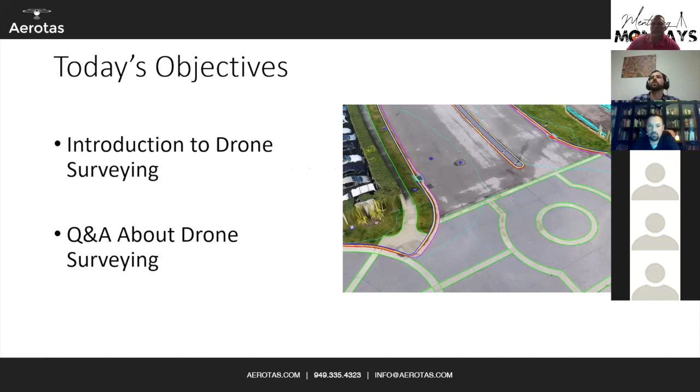So the main objective is just an intro to drone surveying and a Q&A about drone surveying and some of the types of work that we do. This is in no way at all a sales pitch. This is truly how we view the process of drone surveying. But just a little bit about us. We have been doing drone data processing for land surveyors since 2014. That is all we do. We work exclusively with licensed surveyors and engineers. So we've gotten over the last 6 years to know this stuff pretty darn well.

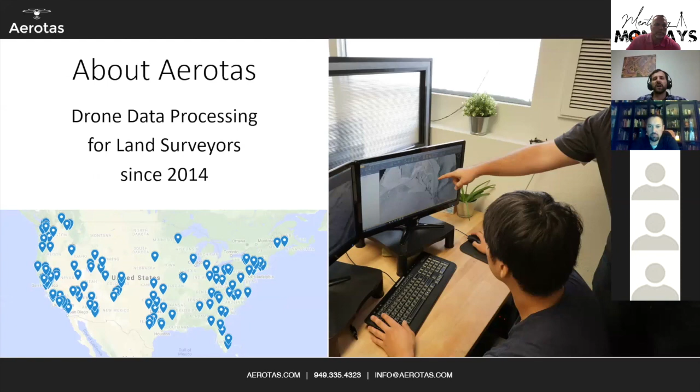A little bit about me. I am the CEO, founder, and lead photogrammetrist of Aerotas. I actually have an educational background in finance and statistics, and statistics is what led me into photogrammetry. And I am a certified photogrammetrist as well. So those are my credentials on that end.

One of the things that I bring up right at the beginning is our philosophy to drone surveying: if your drone program isn't saving you time and money, it isn't working. We very much have a philosophy that drone surveying is not a science fair experiment. This is not, ooh, cool, let's spend all of this money and do something cool with it. We're very laser focused on how to use it in business. If you spend $100,000 on a drone, on hardware, and it takes you 50 hours in the office to get a single half-acre project site done, that's bad. That's a science fair project. We don't like it. So I'm going to reference that a lot.

It's worth noting, because a lot of times people ask, what about this thing on the cutting edge? Is it possible? A lot of times the answer is, yeah, it's possible, but it doesn't make sense to. You guys are surveyors. If it makes more sense to use a total station, use a total station. I'm not going to say, yes, you can, but you'd need to take 8 million photos from these angles and a server the size of NASA to process it all. That's not where we go. We really focus on practical applications, and how you can use this technology most simply, most effectively, most reliably.

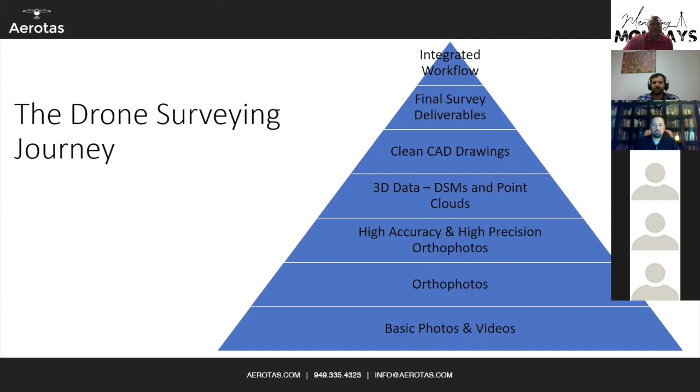them money. You want to make it integrated as part of your workflow so that it makes everyone's life easier, from the field crew to the office guys to your end clients, who will wind up liking this stuff and saying, hey, wow, that looks so much better with the imagery. You turned it around faster, it's cheaper, makes you more competitive on bids. That integrated workflow is really how you wind up getting all of that last stuff put together. And to do that, there are a couple of really important steps.

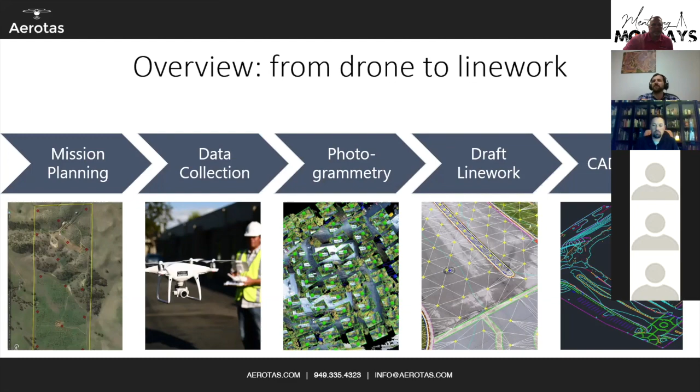So these are the main 5 steps that I will go through that go from "I'm thinking about using a drone on a project site" to final deliverable. Starts with mission planning, which is of course the basic where to fly, how high to fly, should you use a drone at all; data collection, going out in the field. And then the office components are photogrammetry, which is image stitching; drafting your line work, extracting the data that you want; and then finishing it in CAD, putting everything back together in CAD for a final deliverable. And I've got some examples of this stuff too.

Because ultimately, what you're looking for, or at least what clients and users are looking for, is a survey. Very, very few people look for a drone survey. They want a survey, and they don't care how you get it. Some clients do, of course, and it is important to disclose methodology, obviously, but ultimately, most clients don't dictate you must use exactly a Trimble R10 or a Leica GS16. They say, get me a survey and make sure it's accurate.

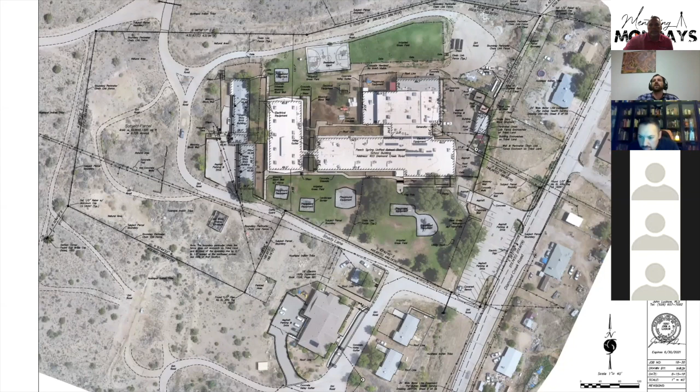And so this is what a final deliverable looks like. A good chunk of this was collected with a drone, but not all of it, because there's easement data and other data on there that can't be seen from the air. But this is what a final survey deliverable should look like, part of that integrated workflow with drone and your other data sources as well.

But to start off with, one of the things that I like to talk about first that everyone's interested in is the latest in drone technology. First off, the main thing about drones is actually not the drone itself, it's the sensor. That's what gets you your data. And there are 3 major categories. The first is a drone-specific camera. If anyone has a DJI Phantom series, Phantom 4 Pro, Mavic series, Phantom RTK, that's what you're getting. These things are built into the system. They're extremely reliable, super easy to use, and actually get really good accuracy. Far and away, that is the most common thing in drone surveying.

Currently, a good LiDAR option costs about $150,000. The new DJI one, all in, so the sensor, the drone, literally all the stuff you need, you're looking at about $45,000. So still not cheap at all, but considerably better. Hasn't been released yet. That's coming out probably in January, when they'll actually start shipping. We already got our orders in with DJI to get those early so that we can do the early testing on it. So we'll let you know about those and our test results the instant that we get them, if it actually lives up to the hype.

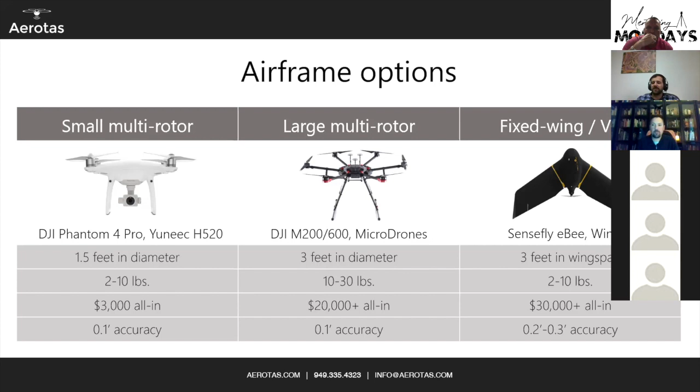So that's hardware. But now to get back into what the actual process of drone surveying looks like, as far as those five steps that I had. The first one is, of course, mission planning. And mission planning is really, really important. But first, we have to talk about what it is. It's asking basic questions like, is this a good site for drone photogrammetry? Not every site is. Like I kind of mentioned, vegetation is a big problem. If you have dense tree canopy and you need ground topo data, drone photogrammetry is not going to be the best solution for you.

As well as asking a few other questions. Is it legal to fly here? What altitude should I fly? What's the appropriate overlap? How many ground control points should I set? Where do I set them? And how do I arrange the flight pattern? And then what still needs to be ground surveyed?

For people that have actually done a couple drone surveys in a row, they know this is actually really easy. You get to know this pretty well. It's not rocket science whatsoever to figure out these questions, but it does just save you time to ask it in advance to decide whether or not you're going to use a drone or whether you're going to bring out the GPS or the total station or any other number of tools available for you guys.

We talk about what's a good project for drone photogrammetry. General rule of thumb, good projects for drone photogrammetry are anywhere between half an acre up to about 500 acres. Anything smaller, it is typically faster and more cost efficient to just shoot everything on the ground. Anything larger, it starts to make more sense to hire a traditional manned aerial photogrammetrist. Same thing applies with linear projects. If you're doing any sort of corridor mapping, railroads, pipelines, things like that, up to about 20 miles makes sense to do via drone.

Generally speaking, the higher you fly, you cover a lot more area, a lot more ground with a slightly lower accuracy. But generally speaking, most projects that we see are flown at about 200, 250 feet elevation, and 100 foot is reserved for very tight, small projects that are mostly hardscape. 400 feet is when you need rough topo over very large areas. In fact, I do actually have some examples here. Zoom thing. There we go.

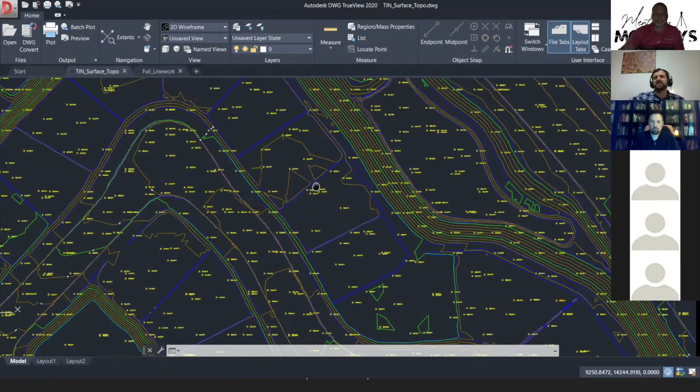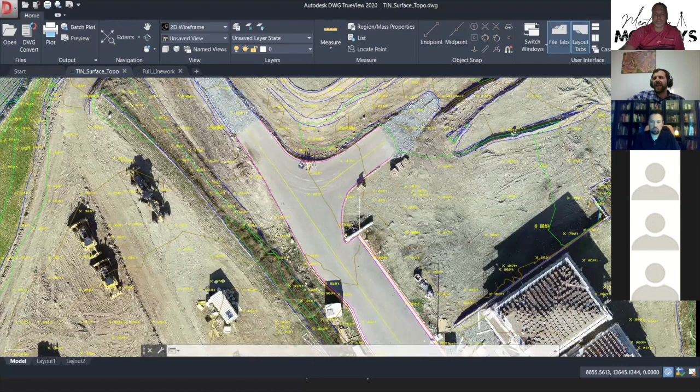Like this is a huge, I think I want to say this is 50, 80 acres or something, just big dirt grading lot, empty lots that was done via drone that just needed rough contours. So it was flown at a couple hundred feet, and this is what our final product looks like. And you'll notice this isn't a fancy point cloud or something. This is actually clean topo so that it's not contours going all around the tractors and trailers and everything. This is really what a final drone product ought to look like. And of course, these are just our CAD standards, but making it look right to you is dependent on your project needs. So that's kind of what it looks like and where your requirements are for the actual accuracy.

Other things that commonly get asked are things about overlap with a drone, front lap versus side lap. What are the different requirements? There's a lot of, I want to say, debate almost within the community of what the right overlap is. Traditional aerial photogrammetry uses very low overlap because they're using extremely expensive cameras. We have found through the many thousands of projects that we've done, the sweet spot is about 75% front lap and 75% side lap, which means that about 75% of each photo will be covered in the next photo. That gives good reliability and redundancy and high accuracy without getting too much data. And too much data, as I'll talk about in a second, is very much a problem with photogrammetry and with drone surveying.

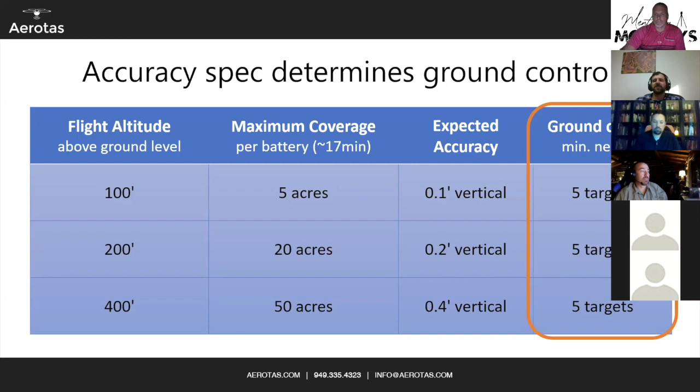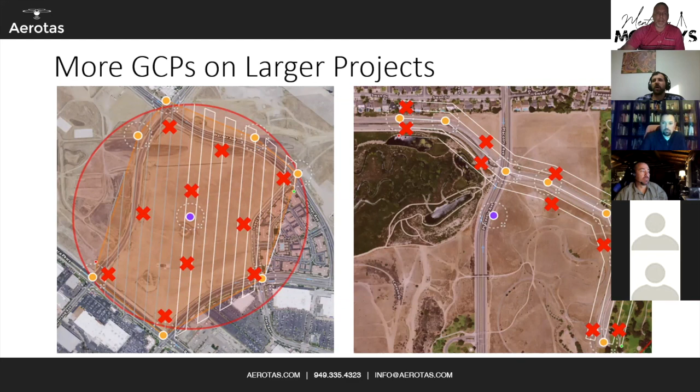Larger the project, more ground control you need. Pretty straightforward, kind of goes without saying here, just some examples. And of course, I will have a copy of this deck available to everyone after the fact if you want to look through any of this stuff.

With the advancement of airborne RTK and PPK data, that's something that we're seeing a heck of a lot more now, which is great. The technology for airborne RTK and PPK has advanced dramatically and is really high quality now. However, do not believe the hype that most hardware companies say when they're like, you don't need ground control points whatsoever, it's got RTK, it's perfect. That is just not true for surveyors. Surveyors have a higher tolerance for accuracy.

The RTK data is very, very good at determining where the drone was when it took the photo. But you do not care about where the drone was, you care about where the ground is. And in between the drone and the ground is the camera, and there's a lot of noise there. So you actually do still need some ground control just to make sure that everything is in alignment. As far as camera calibration goes, you can see shifts of up to half a foot, sometimes more, even with perfect RTK, PPK data.

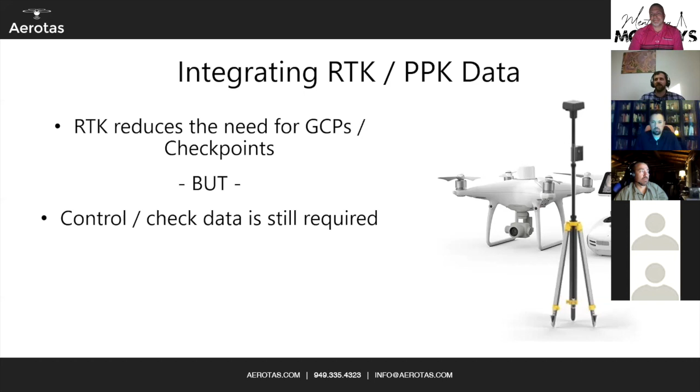So if you take one thing away from this slide here at least, it's that do not trust the people that say that RTK means that you don't need control. As surveyors, you need control, 100%, at least to get survey grade accuracy. If you just want a pretty picture, then sure, go for it. Next up, let's talk about field data collection.

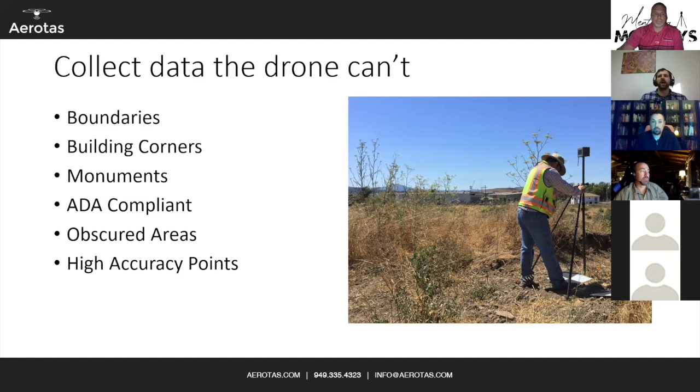If you're doing an ALTA survey, there are a number of things that legally have to be shot on the ground. Monuments, your ADA compliant areas, and anything that's obscured from the air, but the drone is capable of getting pretty much the rest that you need.

As far as actually collecting your data, we recommend checklists. We give these things out for free that are just little things to keep you on track, keep everyone together, keep you from making the really stupid mistakes that I used to make all the time, like leaving batteries in the office or not remembering a memory card, because when you get to the field and you don't have everything you need, it's a real bummer.

And maybe that's why you have 170,000 miles on your truck in a year and a half, is because people have to keep going back and forth to the office because they forget things. But hopefully not. Maybe it will at least prevent 1 or 2 return trips to the office from just forgetting something stupid.

But yeah, the field operations workflow is pretty straightforward. You check your site restrictions, check the weather to make sure it's not raining, pack everything up, and load the mission and click go. These drones literally, truly, completely fly themselves. There is no piloting, no skills, no crazy stuff necessary. You don't need to be an ace drone pilot in order to fly a survey.

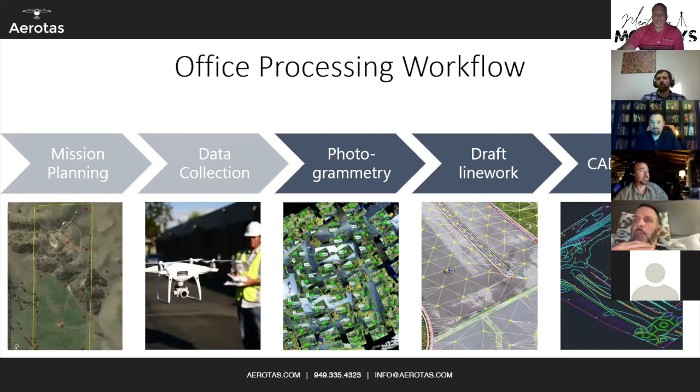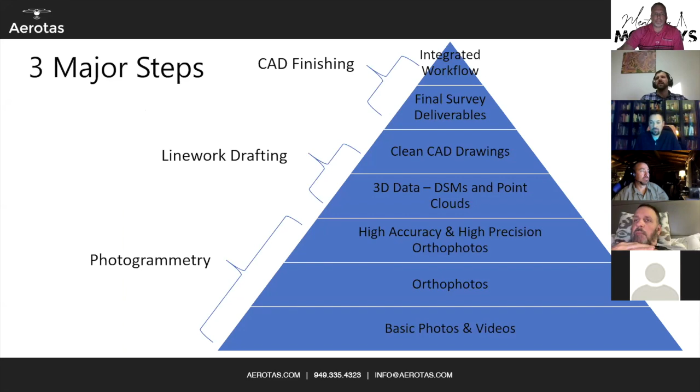So that's the field half, but what a lot of you are probably interested in is the office side of things. The office workflow is these final 3 steps of photogrammetry, drafting line work, and then CAD finishing, right? Photogrammetry really gets you those first couple of steps on that drone survey journey. Linework drafting extracts valuable data, and it's bringing it all together in CAD that gets that final portion.

So the first step is photogrammetry. Now, what is photogrammetry? Photogrammetry is the art and science of taking 2D photos and turning them into 3D accurate data. There are lots of softwares out there, from Pix4D to DroneDeploy to Agisoft Metashape. We're familiar with all of them. They all actually work for different applications. But generally speaking, the photogrammetry step takes your photos and ground control point data and turns it into a point cloud, an orthophoto, and a digital surface model.

Then you need to take that digital surface model and reduce it into something that's useful. For anyone that's dealt with point cloud data, whether it's from a drone or from LiDAR, you know that it can easily go 10 gigabytes in size and break even the most powerful office workstation. And you certainly can't just give a 10 gigabyte file to most of your clients that actually want an ALTA survey, for example.

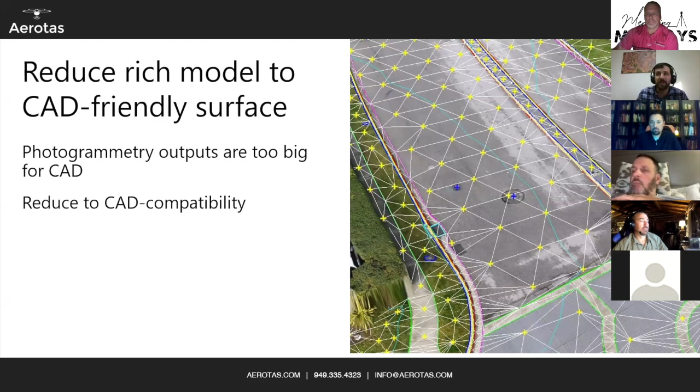So what the linework drafting stage does is it takes those rich outputs and it extracts the actual data. It's putting the different layers on things, drawing curb lines, creating a clean topo TIN surface that is actually usable, getting rid of things like vegetation, vehicles, artifacts, interpolating your lines underneath trees, all the stuff that photogrammetrists have honestly been doing for a very long time with traditional photogrammetry. This is not reinventing the wheel at all. It's just applying the newest technologies to it.

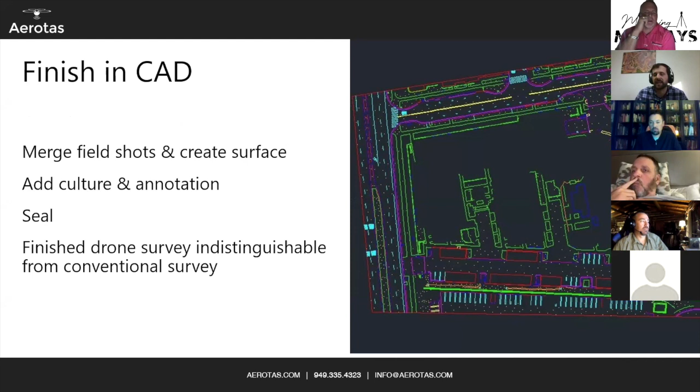And then you bring it all together in CAD. You merge your field shots in, create a clean surface, add your annotations, make sure that it prints out at the right scale that you need, that sort of thing. And that is then how you get to your final survey deliverable.

So just to summarize what the office workflow steps look like, you start with photos, ground control points, and RTK or PPK data. That goes through the photogrammetry step, which gets you an orthophoto, digital surface model, and point cloud.

Then that starts to go through the Linework Drafting stage, which will get you your 3D points, your polylines, typically in like a DXF format. You get it in CAD finishing, merge everything else together, and that actually gets you your final project in a DWG AutoCAD package, something along those lines.

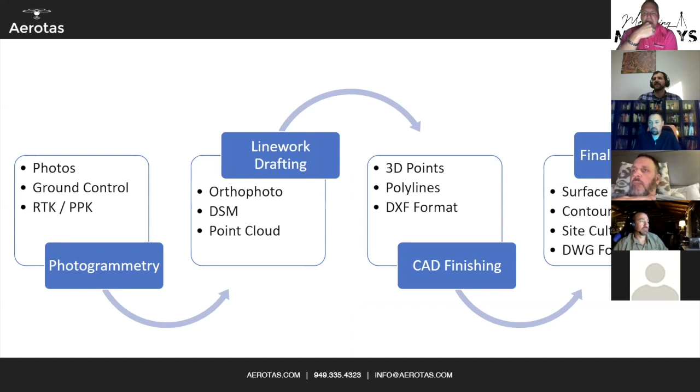So let's go into detail a little bit more, starting with photogrammetry. Photogrammetry actually gets the biggest amount of, I guess, hype and airtime almost, because there's so many softwares out there, Pix4D being the primary one. Photogrammetry is the art and science of making measurements from photographs. So like I said, take those photos, integrate everything together to get that 3D model.

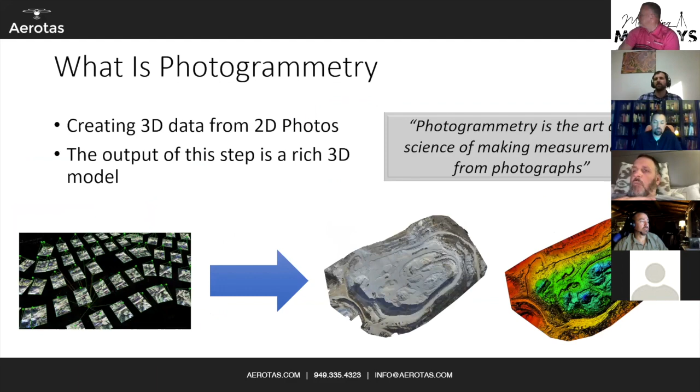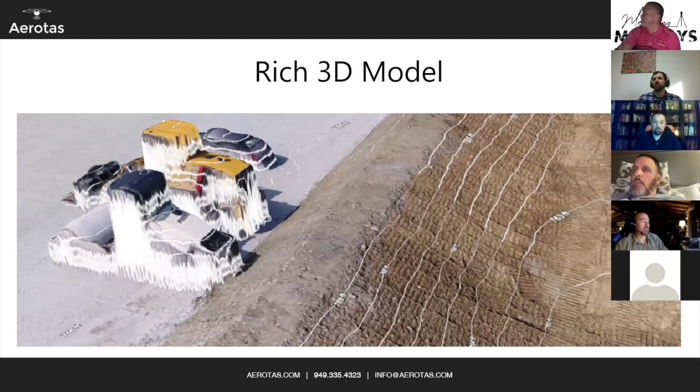But it has problems. If you look here, this is what a raw output from photogrammetry often looks like. You can see that it has drawn contours around the cars. There's some artifacts on those vehicles, and they're pretty noisy lines, not to mention that the files are absolutely huge. But the biggest thing to be aware of is that photogrammetry actually takes a lot of time. It takes a little bit of human time. If you have a skilled photogrammetrist, they can knock out most projects in a couple of hours, but it takes a lot of computer time.

There's a lot of data, and this is why I talked earlier about there is such a thing as too much data. Even with a high-end, $5,000 computer, a big project will take overnight to process. And if you made a mistake at all, it might take overnight to process again, and it can take a very, very long time. So that's important to be aware of. And the reason why a skilled photogrammetrist really matters is so that you get it right the first time and don't have to take weeks and weeks fiddling with data to get high-quality results.

But there are different structural options for it. You can do automated, cloud-based processing. That's like a company like DroneDeploy. DroneDeploy is fantastic. They are fully automated, very affordable. You drag and drop photos and you get a pretty picture. Super, super fast, super cheap, but generally very low accuracy. It usually will not have the accuracy tolerances that surveyors require.

The other common one for surveyors is local processing software, which is going to be buying a copy of Pix4D or renting it for their monthly fee. Gives you a ton of control, but it's very expensive. It's a long learning curve, and you do need to have your own hardware and everything. So that's an expensive commitment.

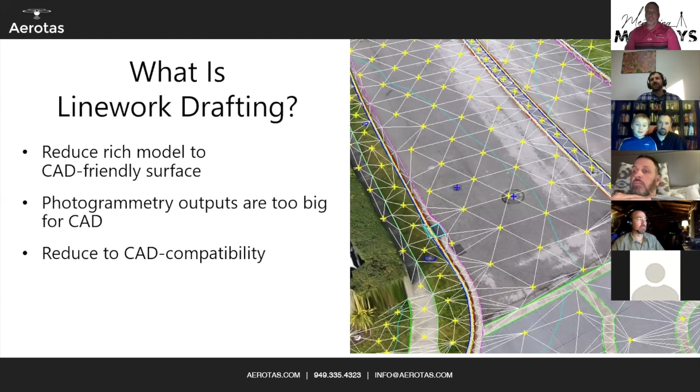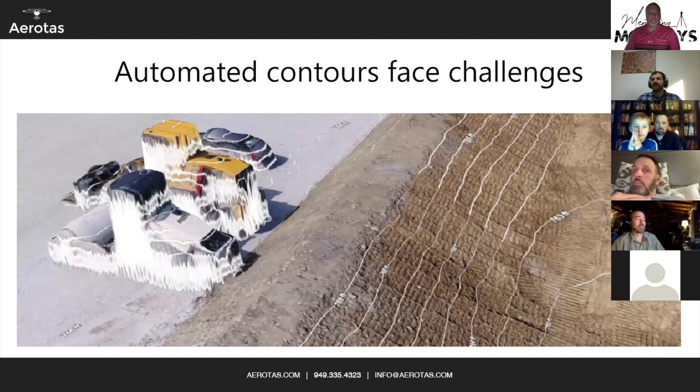You need to know the number of parking spots in an office complex. A point cloud is not going to give you that answer. So like I said, there are a couple of reasons why it's necessary. The files are too big, too much data you don't need, and not enough data that you do need. It's ugly. There are bad contours. There are artifacts that you might see in certain things that all need to be cleaned out. Like I said, the automated contours are not something that any surveyor would ever want to deliver to their client.

They look very ugly. But like photogrammetry, there are different ways to do line work drafting. There's some automated software out there right now that you send them a point cloud and it tries to automatically extract data. We have had, I'm being honest, pretty bad experiences with those so far. They're very inaccurate and require a huge amount of quality assurance work in order to get high quality data.

You can draft it yourself. That's the most known way to do it. Reliable known product to have your own people just draft, extract data. But the problem is it's expensive because you have to pay for all of it. It's very time consuming. Or again, hire a photogrammetrist. This is what photogrammetrists have been doing for decades, just with different technology. It's now done with the drone.

People always ask, what's the best software to use for this? There is no single magic software. We use a lot here, just some of the softwares that we use to actually extract data, sometimes from the point cloud, sometimes from the orthophoto, sometimes from the digital surface model. And at the end, like I said, Linework Drafting also takes a lot of time, like photogrammetry. But Linework Drafting takes very little computer time and a lot of human time. It's very, very tedious.

It takes good QA/QC to make sure that you don't miss things. And there really are no magic solutions out there for how do you start with photos and then actually get a good CAD file. We have all kinds of CAD draft standards as well. Just make sure that you understand how things are marked, right? How do you mark the topo around vegetation? How do you deal with drawing curb lines when there's cracked concrete? What different curb lines do you mark? How do you interpolate lines that are going under trees? Having those CAD standards is very important for creating a reliable, high accuracy product.

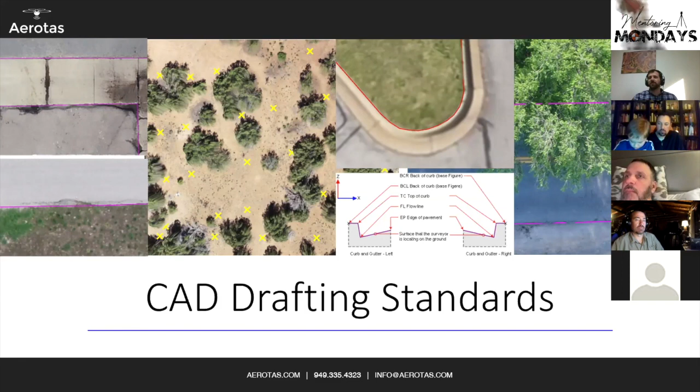And again, we have not reinvented the wheel here. We've relied on the learnings from traditional aerial photogrammetrists over the last 70 years or so to guide what our CAD drafting standards look like. So if you've ever received files from an aerial photogrammetrist, our data is going to look really, really ridiculously similar because we've kind of been cut from the same cloth there.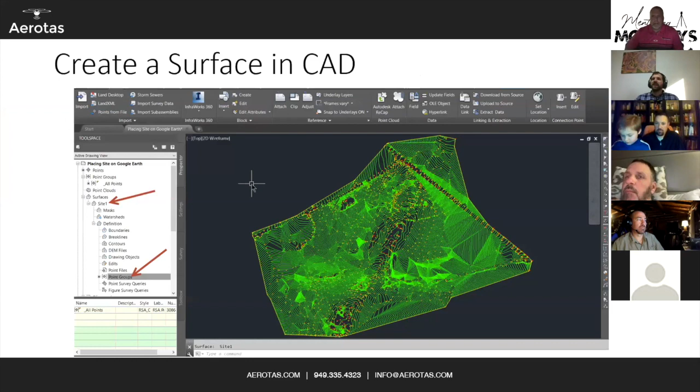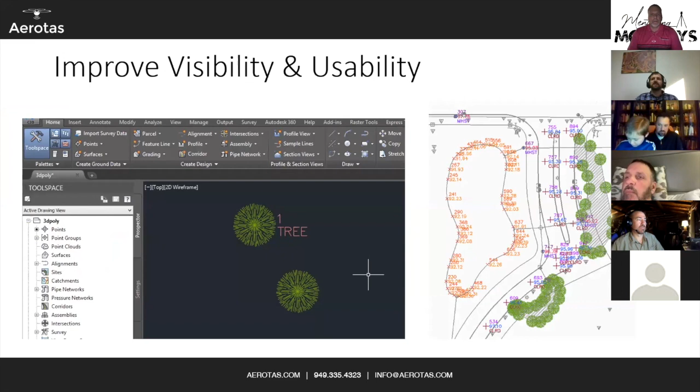And then the CAD finishing part is really important to make it into that last step to actually being usable. Getting that site culture, getting those annotations, saying which streets are where and how many parking stripes. Merge everything together, your drone data with your field data. Create your actual TIN surface in CAD, get your major contours, your minor contours, your annotations, your scaling. You get your custom layer templates to make sure that it's exactly what you need, that it matches your project. Improve your visibility by assigning symbology to different trees and signposts and manhole covers and yada, yada, yada.

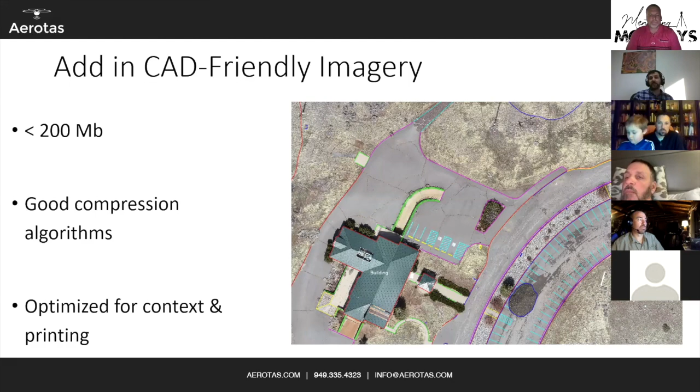And then the last part that we do actually is adding in CAD friendly imagery. This is a surprisingly tricky part that we have really perfected over the years of actually getting imagery that is usable, but not enormous. Because full resolution orthophotos are often many, many gigabytes. And if you try and load them into Civil 3D, they just explode, which is a pain. So having good compression algorithms that optimize everything for context and printing and backing all of your line work up is really important in getting that final survey delivered.

Because once again, this is what the final product should look like. It should look like a survey, something that you've seen before, and it should look the same whether it's been made conventionally or with the drone. The drone is just more likely to have better, higher quality, more up-to-date imagery, but just as accurate as before, and usually better, faster, and cheaper.

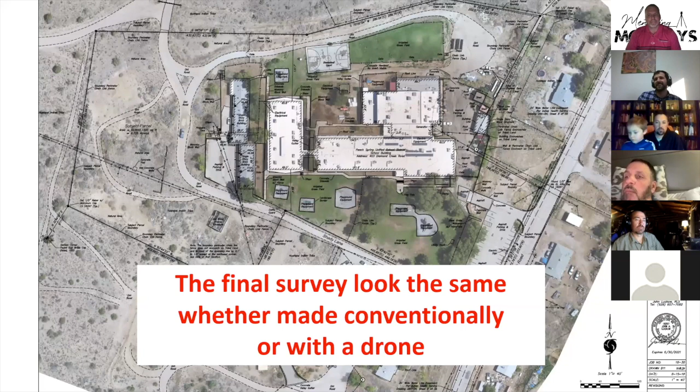That's really the dream of this technology. It's here. It's really cool. So just to wrap things up, and then I will open things completely to Q&A.

Like I said before, our focus is saving time and money. A lot of technologies way out there on the cutting edge can do cool things that you might need a $1 million budget for. And actually, if you want to talk about those, I'm very familiar with them, but we just don't recommend them to our clients because people don't have a $500,000 budget for whatever the shiniest new toy out there is.

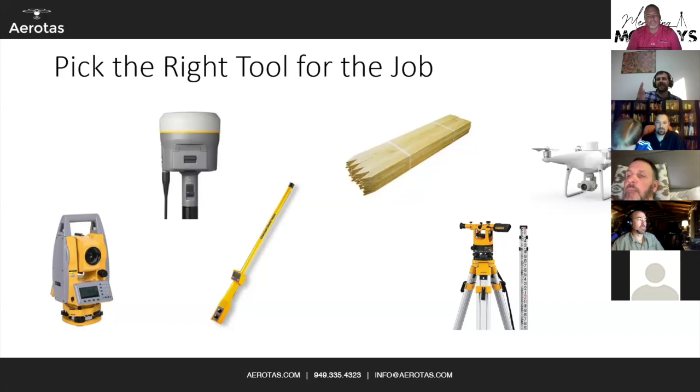Another thing in summary that I want to hammer home is to make sure that you pick the right tool for the job. The drone should be a tool in every surveyor's truck, but it should be just that, a tool. A drone does not make someone a surveyor, and it saves a bunch of time and money, but it's not the jack of all trades. It will not replace your GPS. It will not replace your total station. It is a great tool to have, and make sure that you pick the right tool for whatever project you're working on.

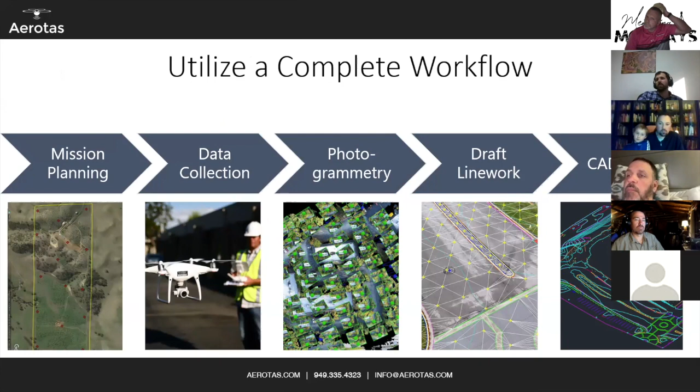Also, make sure you use a complete workflow. Any one of these steps, if you just kind of blow it off, can wind up just costing you time. It doesn't make it impossible, but it winds up taking a lot more time if you don't get things right. One of the stories that I always like to finish on is we've seen a lot of situations of what I call good gear, bad workflow.

This is an actual example of a client we had that wound up spending nearly $100,000 on the highest end equipment you've ever seen. It was a Microdrones drone, a $20,000 Intel Xeon server, licenses to Pix4D and TopoDOT and Trimble Business Center, massive upfront costs, almost 100 grand, and they took 50 to 60 man hours per project, and the entire program wound up being canceled because it was so expensive and so time consuming that they did not use it on actual projects.

We saw the data, we processed the data for them. It was spectacular quality data. That's not the issue. It's that it was just way too expensive to have the right workflow. A good workflow example is using something like a Phantom, a cheaper drone. You fly the site, shoot your GCPs on one day. Next day, you upload it to us. We process the photogrammetry, the linework drafting, and we deliver all of that to you.

And the third day, you can verify the data in the office, merge in your field data, and deliver it to a client. That's a good workflow. That's how a lot of people wind up making money on that. Much smaller upfront cost. If you're using the basic Phantoms, you're looking at a couple thousand dollars total all-in cost to own the equipment, and only 10 or so man hours per project. So it saves time, saves money.

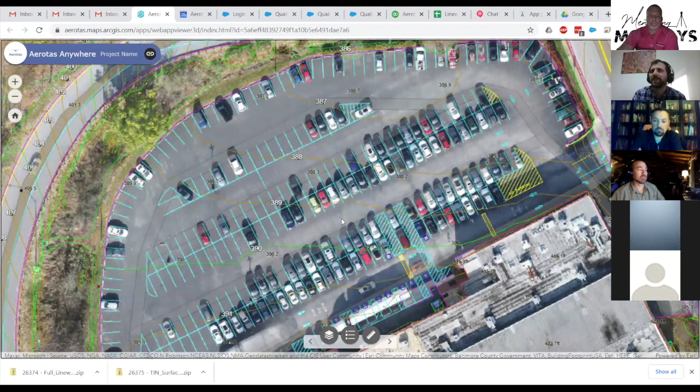This is just one of our web viewer projects, I think this was used for an ALTA survey, but this is all in a web viewer, not actually in AutoCAD or anything. Once again, you can see all of your paint striping is interpolated under the cars, clean contours that don't go over the cars. And this is one that's great for sharing with clients because they do not need to have a Civil 3D license.

I'm sure most of you guys can view DWG files, but many of your clients would not be able to. So being able to actually have 3D data in a web viewer that is accessible by clients without software is just another cool thing as part of that artistic side of ultimately making the data useful. That's what this is all about. It's about taking all of this survey data and making it way, way, way more useful.

Any other questions about drone surveying, or any problems that people want to talk about that they've had or seen? I have a question. First, do you guys fly any of your own jobs, or do any flying yourselves? Only for test purposes. So we do a lot of flying for testing purposes, but ultimately we work all over the country and we're not on the job site.

Well, I guess my question is either to you or generally in the group. It comes off something that we saw probably 3 or 4 weeks ago. A guy gave an example for a CAD drawing, but he also supplemented an aerial image in the background.

During his presentation, he was flying in the center of the road. In my opinion, as a remote pilot, I think that's not how it's supposed to be done, but I know a lot of people interpret operating over people differently. So I wondered what your opinion was.

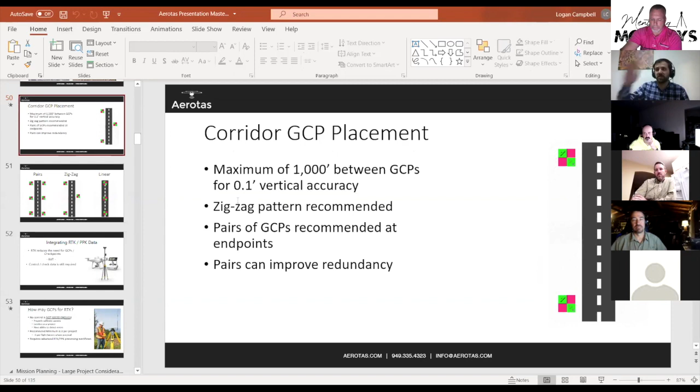We did a project where it was pretty much a straight as an arrow corridor. I believe this one was about 5 miles long, and we set pairs of control every 100 feet and processed it probably 100 times using different ones as GCPs, straight down the middle, or what we would call, like you said, linear, zigzag, and then setting them in pairs. And also we were testing distances: at what distance do you start seeing errors? Errors to us is anything more than 1/10 of a foot vertical on independent checkpoints.

And what our research found is that we were kind of surprised. The pairs do not dramatically increase accuracy over zigzag. It was within the margin of error statistically. But you are correct. Linear ground control is a bad idea on projects. You need to do either pairs or zigzag and never exceed more than 1,000 feet between control points. That's for non-RTK projects. If you have RTK, you can go a little bit further. But for non-RTK, never exceed 1,000 feet between control points.

And you do want to do a zigzag, and especially at the ends of the corridor, have pairs to keep any twisting from happening along that center line of GCPs. So great point, and it's another thing that we've done a very extensive case study on. Awesome.

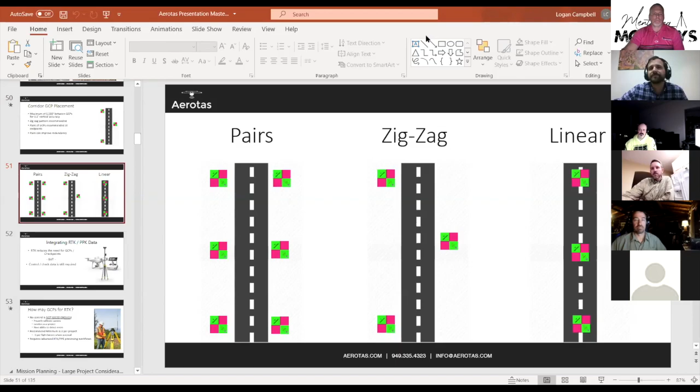All right. Anybody else? Do you guys do any LiDAR processing, like fixed wing, Logan? Yes, sir. We do LiDAR processing. Like I said, the reason it's not a huge component of our business is because it's so darn expensive right now. Yep. I think last year I flew 3,000 miles of fixed wing pipelines, doing geohazard analysis, slope shades, hill shades, and everything. And I'm doing 5 more states next year. So I might be reaching out to you then.

Please do. It's the horsepower processing. Each state last year generated about 3 terabytes of data for deliverables, and it starts to get very painful. I'll put it that way. I totally understand. But yes, we are used to doing project sites, even on photogrammetry, that are measured in the hundreds of thousands of photos.

Yep. So yep. Big data is a language that we speak. Doesn't make it easy. But it's easier for me if you do it, so that's good.

A note on LiDAR processing: when we talk about our processing workflow that goes from photogrammetry, then CAD drafting or linework drafting and CAD finishing, we already use hybrid workflows where we extract some data from a point cloud, some data from an ortho photo, some data from a DSM, and then combine it all. So even in photogrammetry, we actually are using point cloud data for certain steps. So when it's LiDAR data, it's just like, oh, I guess that's all you have.